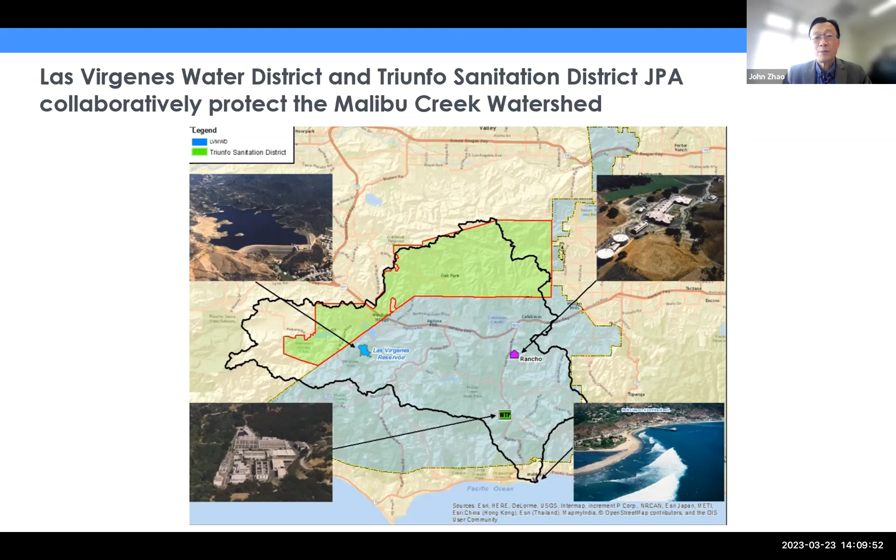And to the upper left, we have the Las Virgenes Reservoir, which has a capacity of 9,600 acre feet. And just a side note, because of the rain, we were able to accumulate 4 times as much water as a normal year due to the runoff from the surrounding hillsides. So that's just to show how much rain we had this year. Next slide, please.

So the drivers, why we want to build a pure water project. The driver to build a pure water project is regulatory. In 2017, we received an NPDES permit, which is based on the TMDL rule from US EPA, that mandates that in our discharge in the summertime, the nitrogen is 1 milligram per liter and the phosphorus is 0.1.

For those of you in the water industry, you know the MCL level for drinking water for nitrogen is 10. So we need to treat the water 10 times cleaner than the drinking water level before we discharge into Malibu Creek. In the wintertime, it's 4 milligrams per liter for nitrogen and 0.2 milligrams per liter for phosphorus. And the regulatory deadline is 2030.

And we're hoping to build our full-scale advanced water treatment plant based on the experience we get from the demonstration project. We're hoping to finish the full-scale project by 2028. Next slide, please.

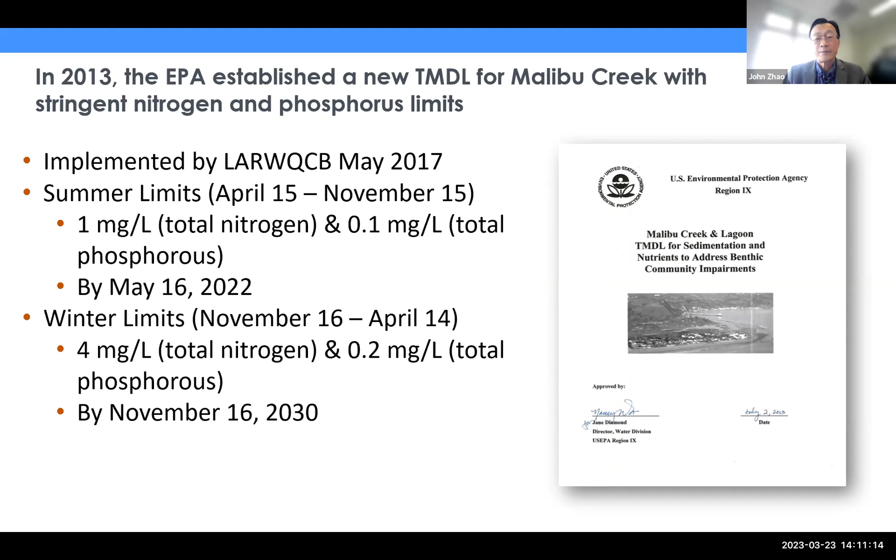So with a regulatory requirement like this, we embarked on a stakeholder process to figure out the best way to meet the regulatory compliance need. So we looked at seasonal storage. We said, well, in the wintertime, can we store the recycled water in a reservoir and then use it during the summertime? As you know, to build a reservoir in the Santa Monica Mountains is not an easy task, if not impossible. We also looked at, can we upgrade our water reclamation facility at Tapia to treat the water to that level before we discharge into Malibu Creek?

And the third option we looked at is, can we utilize potable reuse? We need to treat the water to 1 milligram per liter of nitrogen. Can we use potable reuse via reservoir water augmentation? Meaning, can we treat the water in the wintertime and put this exceptional quality water into our Las Virgenes reservoir and then use it during the summertime? And the stakeholders unanimously agreed that potable reuse via reservoir water augmentation is the project we should embark on. Next slide, please.

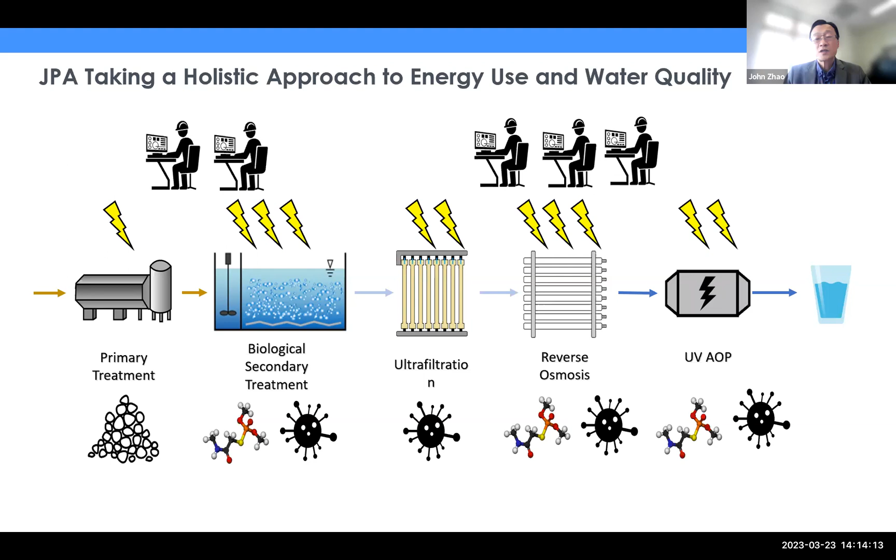And we want to see if we can utilize artificial intelligence and machine learning so that, in addition to the biological and the physical barrier, we can build, using AI and machine learning, a virtual barrier, meaning not only can we reduce energy use, we can safeguard water quality, and at the same time also discover issues ahead of time and make timely decisions while trying to prolong the life of equipment that we're relying on in order to deliver exceptional drinking water to our customers. Next slide, please.

So there's three goals we want to accomplish. The first is that we want the pure water demonstration project catered to our customers, so that people can understand the process, and people can be relatively assured, through visiting the demonstration project and receiving the education documents, that the water is safe. So we designed that, as you can see. Goal number one is for our customers.

There's an interactive process. Goal number two is training our operators. As I just said, we wanted to build and operate our AWTF by 2028. So we want to train our operators who can step into operating their facility, shorten the learning curve.

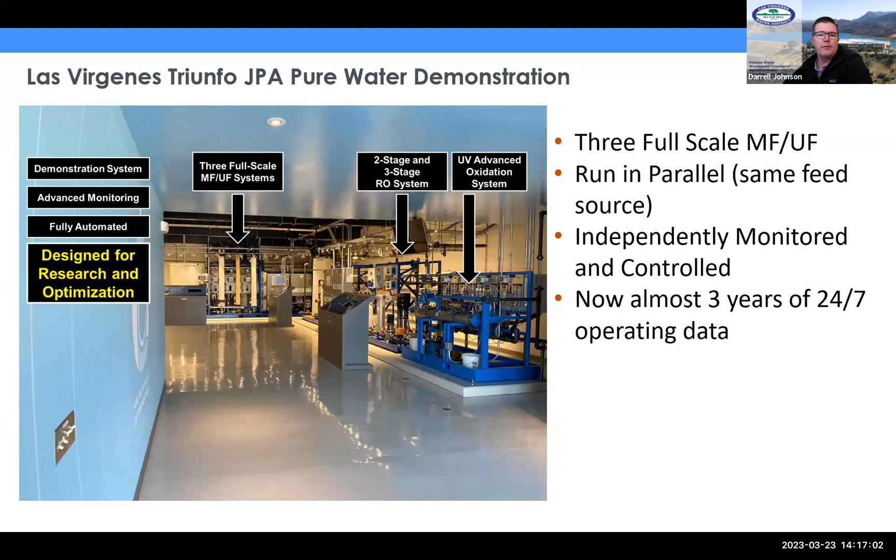We also have a lot of current AI work that's going on. Amos and Andy will both touch on this as we move forward, but our task one is model predictive control to reduce energy consumption. And then we have task two, the pathogen-based advanced water purification control. Both of these are Bureau grants with NWRI, and these are critical to our goals in meeting the direction that we want to go when we move into our full-scale facility.

So what we're going to do is start at Tapia, and because this is a little late in the day, everything got delayed by COVID, we've actually progressed quite a lot. But what I'm hoping you'll realize is that this seed funding from Metropolitan on this initial grant actually kickstarted a whole lot of really interesting research, which Andy is going to go into a bit more later. We're letting the snowball roll on to try and identify where and what is possible and what's worth it when trying to apply machine learning and artificial intelligence.

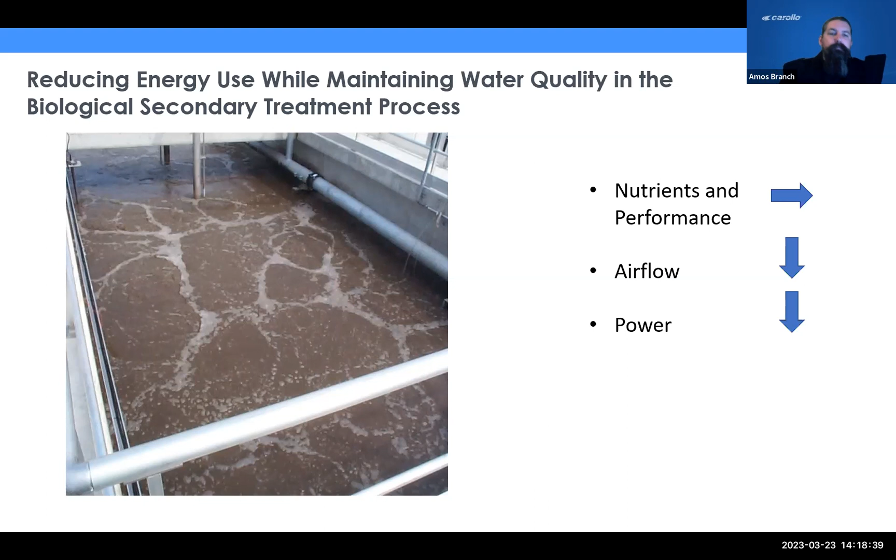So the primary goal when we looked at Tapia was to keep nutrient removal performance at the same excellent level that it was, but to try and drop airflow requirements and thereby reduce power consumption. Now, there's a lot of models and ways you can do this. There's people who've built up solids retention time control strategies based on activated sludge models, and they work quite well. But what we did was a little different.

We were partnered with Yokogawa Electric Corporation, who have used this data-driven model optimization control strategy previously on oil and gas type optimization issues at oil and gas plants. And this was sort of a first step: can we apply this to a water reclamation facility, and where does it get us?

So the initial 2 steps, the steps as part of this grant, were all offline. So Las Virgenes provided their operating data, all the historian tags. That went over to Japan. Yokogawa fit their model to it and started to run what-if scenarios of, well, this is how you're operating now. Could we potentially do any better if we change set points in a more timely manner?

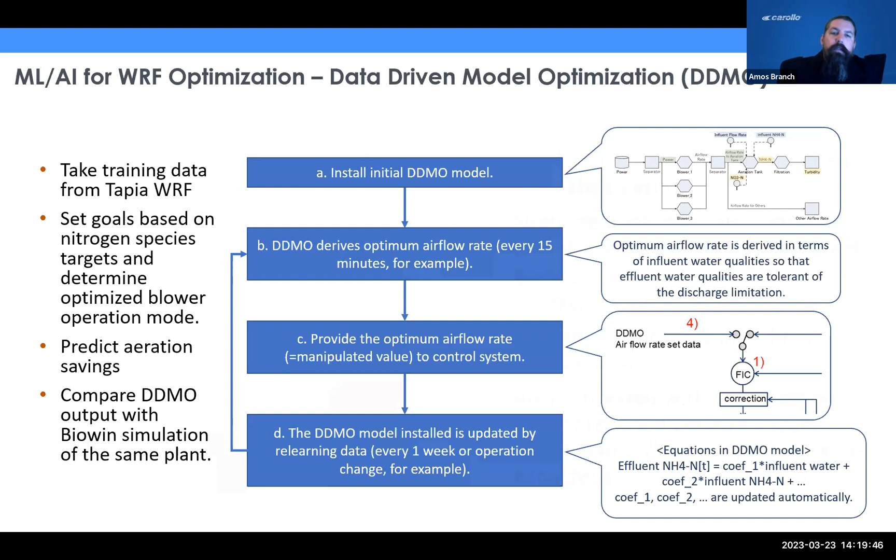So the initial results were quite good. We were able to predict the general trends in data, and we were able to indicate that if you made a few slight changes, there could be about 10% potential energy savings. This resulted in a marginal increase in effluent ammonia, but that marginal increase we're talking about is sort of from typically non-detect values to just being able to see it.

We also simulated an optimization with a goal of reduced ammonia, and we could do that if you wanted to push it down even lower to non-detect all the time. You could achieve that with only increasing energy consumption by 2.7%. So there are a lot of ways in which you could use this tool.

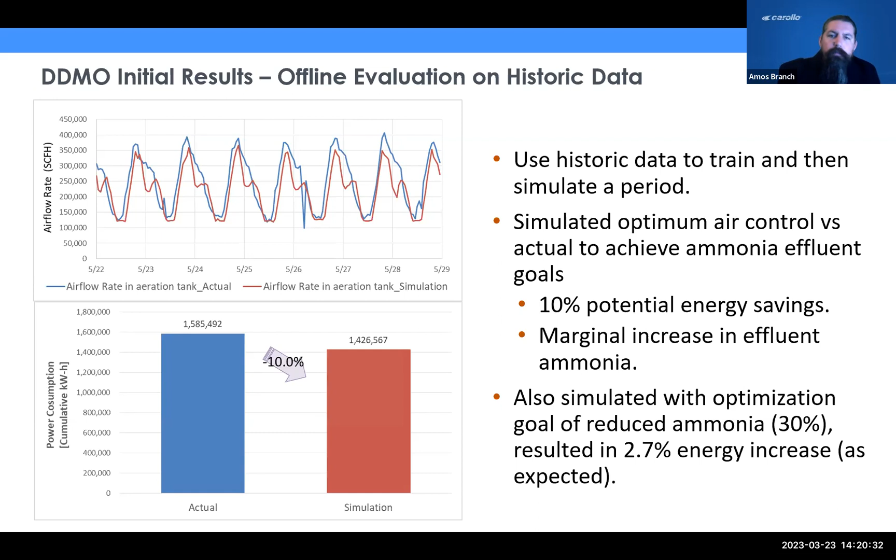Subsequent to that first step, and still as part of this Metropolitan supported grant, Las Virgenes actually upgraded the blowers, and we thought, oh, this might be game over. They've got these fancy new blowers in there now, this new hardware. Wonder if we can still bring anything. So we actually repeated this desktop application, and there was still potential for energy savings, still potential for around that 10%. And there was further monitoring installed during this second stage, which allows us to also demonstrate a potential for a slight reduction in total nitrogen as well, while still saving that 10% energy.

So we were pretty encouraged by these results, but the whole work package so far, I mean, it does use a machine learning approach. DDMO falls under that banner, but I wouldn't say it's automated, and I wouldn't say it's convenient. It takes a SCADA historian expert time to download all that data. It took our colleagues at Yokogawa time to fit their models, evaluate model accuracy. And what we really want is an actionable tool. So based on this work and using the results from this work, we're able to put forward a solid bit of evidence and actually progress this to the next stage.

And the next stage is get it done in real time, get it done automatically, and give the advice to your operators. So this is where Las Virgenes had already started working with IOsight, who are a data management company who have these really pretty dashboards. And we were able to pull in the tags from IOsight, get them shipped over to Yokogawa in Japan, and automate model predictive control based recommendations as to what should be happening should the operators wish to sort of optimize their control strategy.

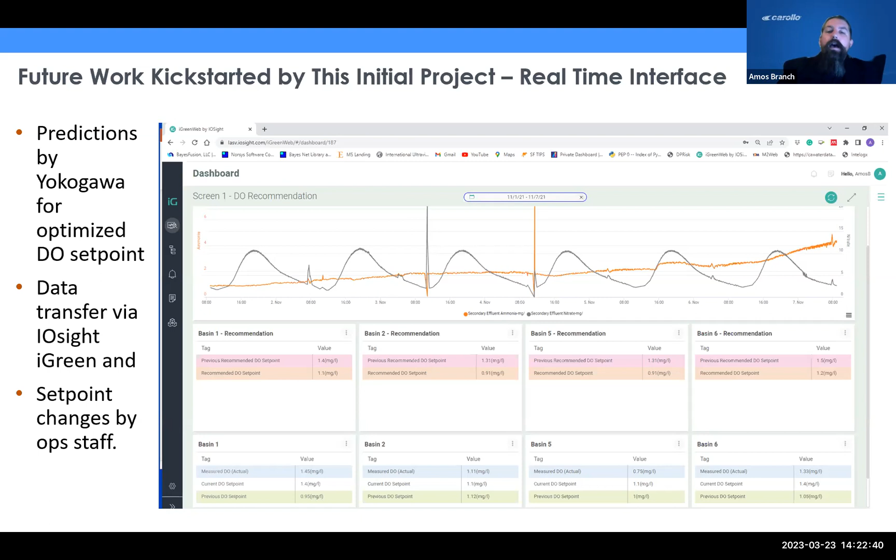And so the status quo is set the DO at something you know works and leave it there. What this allowed was recommendations for that DO set point based on influent flow, influent ammonia, and general plant loading throughout the day. And we were able to trial it in real time. So I'll just show you one of the other dashboards now in terms of monitoring the actual impact, monitoring the changes that were implemented to give evidence that the process was actually doing something.

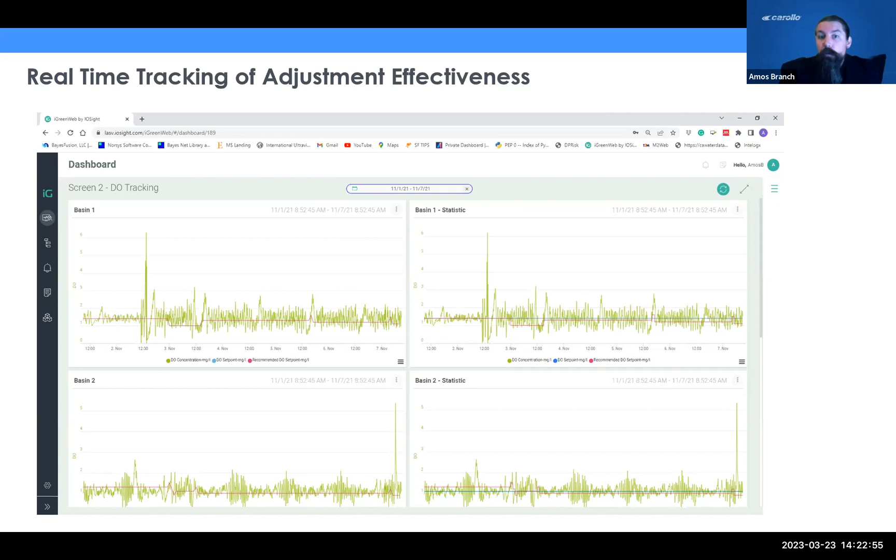And at the end of this, what we realized is that you could potentially shave, depending on what basis you looked at it, either kilowatt hours per pound of ammonia treated of around 25% just from making these simple changes. We only did that during 8 hours a day, or somewhere around 10% if we just looked at that base energy usage. So depending on how you wanted to look at it, there could be some quite useful savings there.

So moving downstream, the next thing is, let's have a look at the potential energy savings at an advanced water purification facility, and what could we potentially do with micro and ultrafiltration. So at the demonstration plant, we do have those 3 different independently monitored and operated microfiltration membranes. They're all operated on the same feed source to help guide decisions on procurement and membrane operation. Fairly typical operating set points. We're not trying to break the mold here. We're trying to develop design criteria.

But a unique opportunity, because this is generating data in quite a large proportion of the time. So almost 3 years of operational data now with 24/7 operation and an uptime of over 94% for all of those units.

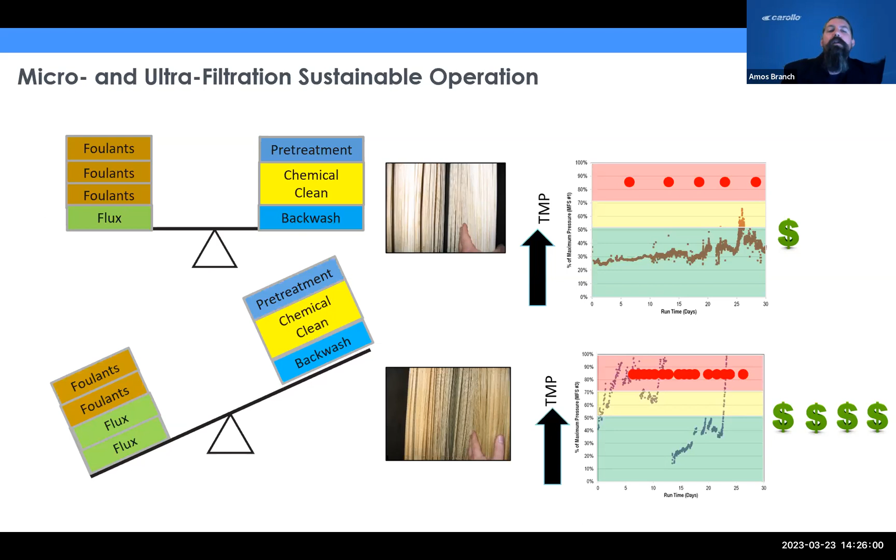So this was something supported by the metropolitan work, and it was, well, what would be useful with a membrane system? I know what would be useful. Can we predict the future behavior? Can we sort of, at a first step, look at where we're going to be down the track? Because what this allows us to do is actually judge whether we are in a sustainable zone or not, theoretically, based on past performance. And it also allows us to start optimizing things like chemical cleaning practices.

So I didn't make it easy for Yokogawa. At the end of November 2020, so this is with about 5 months of full scale operating data from the demo, I told them I'm going to operate like this for the remainder of December. You tell me what my transmembrane pressure is going to be. And what they told me was the black line, and what actually eventuated when I gave them the full set of results at the end of December was the blue dots.

So sure enough, it's a real plant. There's some variability, but what I think is really quite important to point out is that they really did do quite a good job of nailing that central tendency. So we started to get excited about our capability and capacity to start predicting the future, basically, and started to think about applications which we could use this.

Now, I have circled a couple of outliers. The first one's not our machine learning model's fault. That's my fault. I increased the flux. I didn't tell them. We expect that. And then the second one is actually us conducting a recovery clean. So that's a deep clean of these membrane systems. It had only happened 3 or 4 times before this. So the model hadn't really had a good chance to bite at a training set to encompass that event. But otherwise, this was quite promising.

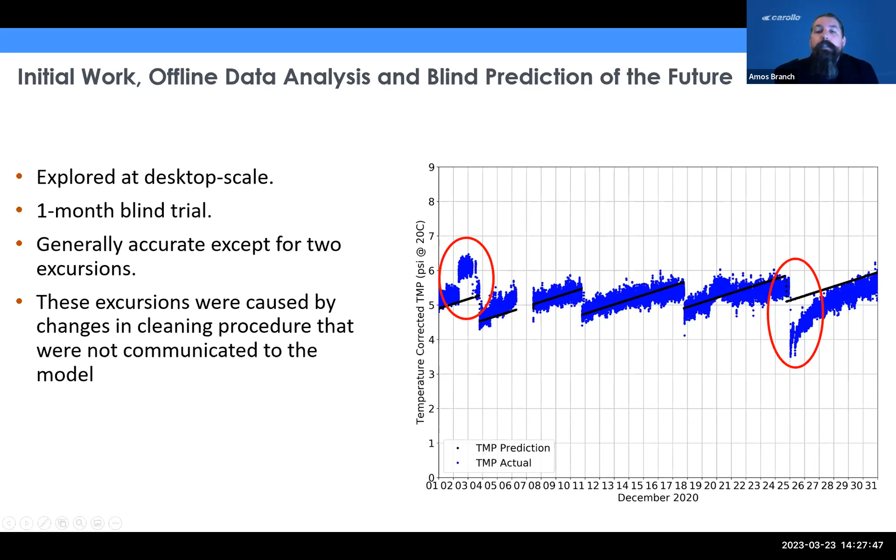So we moved on then, and Yokogawa sort of revised and improved that model. So they discriminated it into 2 different parts. And what I liked about this approach, it's moving towards explainable AI as opposed to black box AI, which is we're trying to target incremental things that we know are inputs and work with those, because that makes it a lot easier to understand what this AI model is doing and what it is doing its predictions based on.

So a couple of the things that were isolated were the fouling rate, so the change in permeability historically, and also the delta permeability that happens when you enact chemical clean. And so you take those 2 models based on past performance and then use them to predict the future. So we did a whole lot of training during the 2nd year of operations, moved around some fairly wacky operational parameters to try and expand the potential range of conditions under which this model could gain some training set and validation set information from.

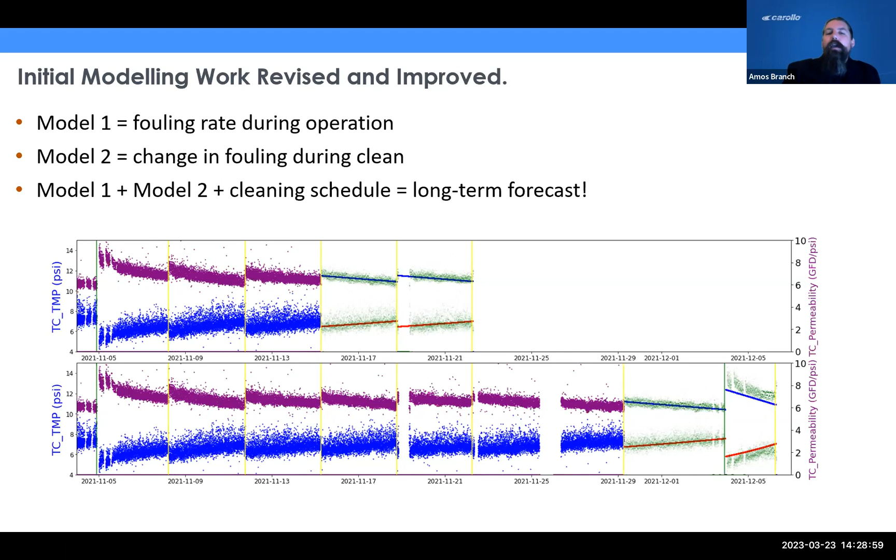Now, I do want to tell everyone, even though we had that pretty staggeringly good whole month worth of predictions, that the weatherman never seems to get in trouble for making bad forecasts. And we didn't want to judge this too hard either, but we did test it hard. And the reason we've got this in there is we do have the preconception that the further we try and predict into the future, the less accurate it's probably going to be. So we wanted to test this model and say, well, how inaccurate are we going to get?

So in terms of the sort of second set of data I'm going to show you, we said, well, Yokogawa, we've got 3 months left in the evaluation period where we can start playing with parameters. This is how we intend to operate. Tell us what's going to happen 3 months down the line at day one of our trial after you've had sort of this training set to work with. And then we started to investigate the accuracy of that.

So in week one, so from day 0, the red line is the predictions, the blue line is the actual data. A mean absolute percentage error of about 5% and a root mean squared error of about 0.3 GFD per PSI. Now, the particular membrane we're looking at typically operates around 6 to 7, so 0.3 seemed to be pretty good accuracy.

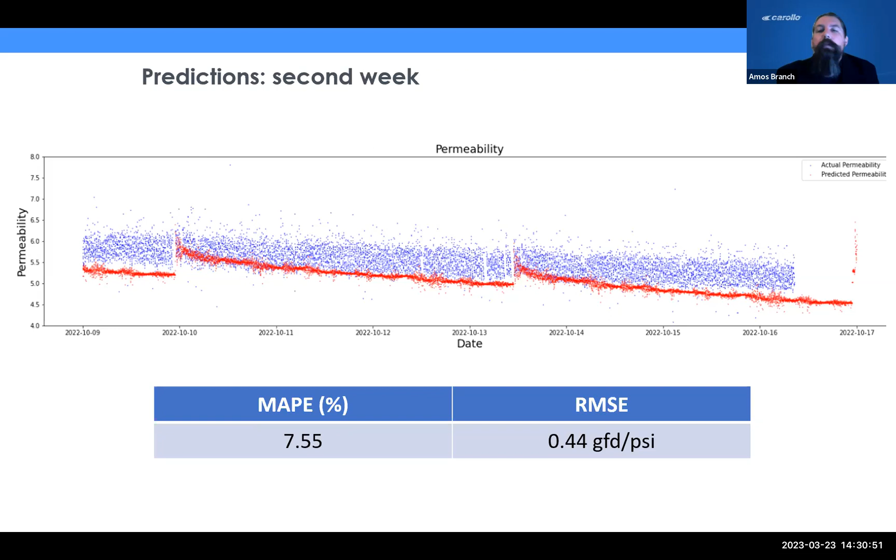Moving into week 2, so this prediction, pushing it further out, it's starting to drift down. It's starting to suggest performance should be lower than we're actually getting. But we're still within sort of 10% error or an absolute error of half a gallon per square foot per day per PSI. Moving into the 3rd week, sort of pushing that error out again to 10%, but still around half a gallon per square foot per PSI.

I do want to point out one thing though, that even though we are getting inaccurate, we do have a bias within the model, which is actually suggesting our future results are going to be worse than they actually are. And what that allows, and that was done by design, was to actually put a conservative estimate on where performance was going to be so as to not run into big problems and not be able to fix them.

What I should also point out is that unfortunately we made it difficult for our friends again, because they called us back up and said, look, there's something wrong with your cleaning. It's just not matching up. And we're pretty sure in our model. And sure enough, we checked with the site and they said, oh yeah, the hypo injection quill to the CIP tank broke last week. So we made it even harder for the model, but it was still able to sort of track within 10% accuracy.

So given we were becoming quite confident with this model, we started to think, well, what are the best ways in which we can use this? And if you think about an actual project, you've kind of designed the system, you've already installed the equipment for the most part by the time you would potentially be thinking about doing something like this.

So with all membrane systems, if you don't want them to foul, turn the flux down. But in reality, at a full-scale plant, you can't just say, I'm not going to treat as much water because I don't want my membranes to foul. It's not really a useful recommendation. However, what is useful is using the what-if capability of these models.

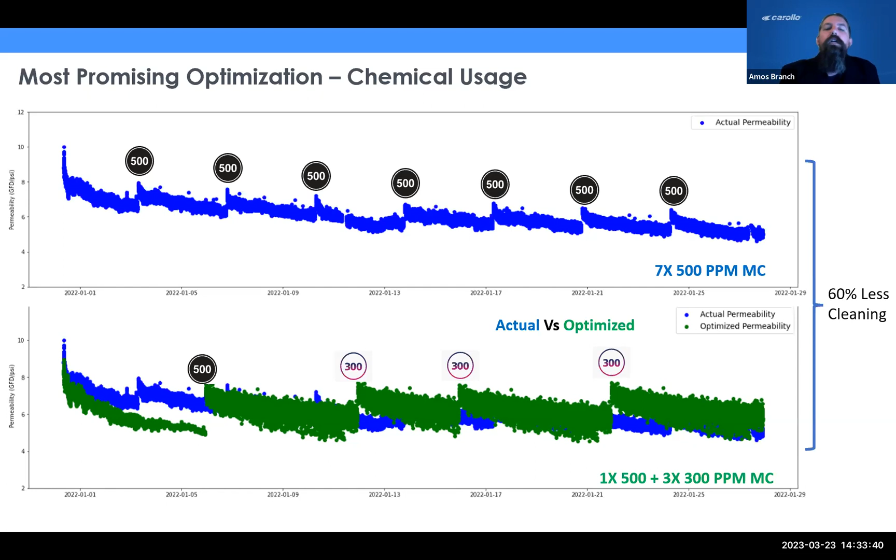So those are the sort of sets of results we've gotten through so far, none of which would have been possible without this initial seed funding. But where do we think we're headed? I mean, there's these big brands of intelligent water, and we're sort of on this semi-autonomous operation track. So what tools do we have with machine learning in the middle? What algorithms can we develop? And what actions are there to achieve our goals?

And that action to achieve goals, and then if you wanted to do fully autonomous operations, so bring on the Skynet, that could come back around and that could be part of the control system. At the moment, we're working on trying to provide better decision support for human operators. So this would be a segregated recommendations platform like we've already put together.

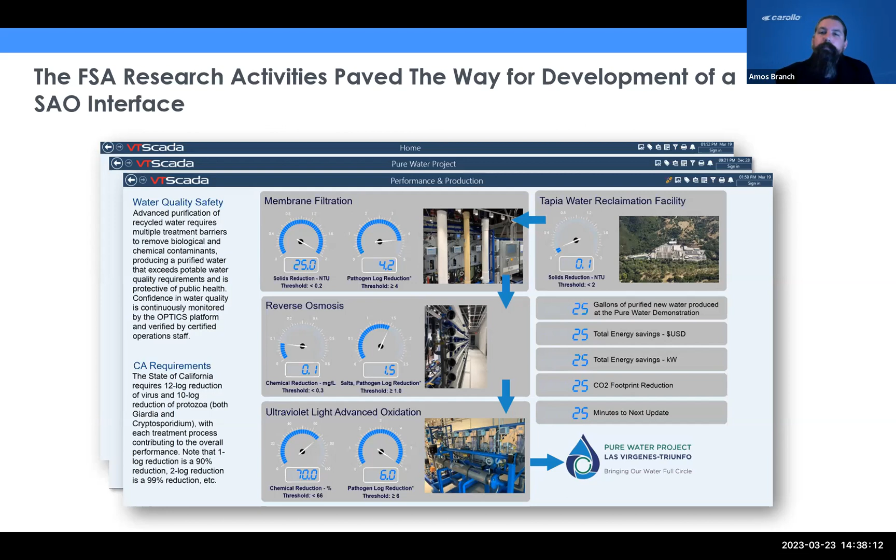So with that, I'd like to hand it over to Andy Salveson to talk about where we've been and other exciting things about where we're going. Thank you, Amos. Next slide, please.

So I was just going through my notes, and this all really started in earnest in 2018. So we're almost 5 years from an original concept. And in that original concept, which was some of this original funding, it was $75,000, I believe. And there was a lot of skepticism. I appreciate that. Skepticism always happens with stuff like this. And since that time, we've now developed more than $3 million of research funding into this topic.

And so it all starts with this original grant from Metropolitan, and I want to acknowledge it really starts with the support from the Las Virgenes Municipal Water District and their dedicated commitment to push ahead, because we didn't know where this was all going to go. But as you've heard from Amos, it's going in a real positive direction. You're seeing the early work looking at using machine learning to optimize biological wastewater treatment, which is all part of this potable water reuse cycle.

You're seeing, as I go left to right, evaluations and predicting ultrafiltration performance, flux and transmembrane pressure, and that is all about energy and then chemical use. And then the latest work now with the United States Bureau of Reclamation and the National Alliance for Water Innovation. These two projects are running in parallel. They're 3-year studies, and they're looking at the whole picture now. So what can we do more with the ultrafiltration? What can we do with reverse osmosis, which, as we all know, uses a huge amount of energy?

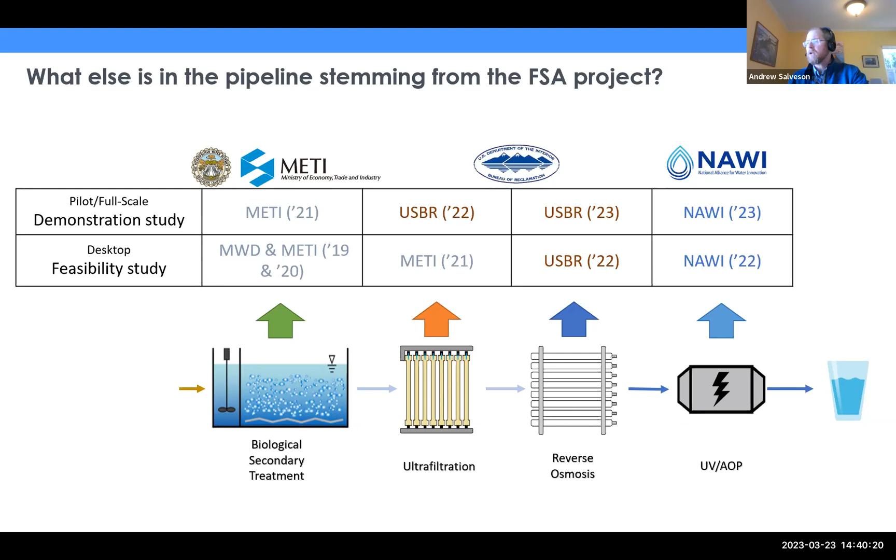And so if you go to the next slide, Amos, I want to highlight just a short little bit on both the USBR and NAWI projects. So this is just some early results from the NAWI work, where we're using a multivariate statistical process monitoring approach, MSPM. By the way, there's so many acronyms with machine learning, it can kind of set you back. But this concept here isn't just looking at one analyzer, it's looking at multiple analyzers that you may not have a significant confidence in, but combined, they can tell you that something's happening ahead of time.

So we're using this MSPM process to predict wastewater treatment plant effluent quality changes well ahead of what we would know if we just had one analyzer running. And so an example here is using different parameters related to membrane filtration, whether it's permeability or turbidity, and also wastewater treatment plant effluent quality like ammonia, to know that there's a problem before it happens. And then that allows us to take corrective action before poor water quality hits an advanced treatment process.

Next slide, please, Amos. Jumping over to the United States Bureau of Reclamation work. So that prior slide, I should say, that data was from the Las Virgenes Municipal Water District. This data here is from the United States Bureau of Reclamation project, looking at an extensive amount of microbiological and water quality data downstream of a membrane bioreactor, and using 6 data sets which have a relatively poor correlation, but when you put them together, they're able to confidently tell you if you're meeting a specific pathogen treatment credit.

So we have this term LRV, which is log removal value, and through analysis of these multiple data sets, we're able to have confidence: are we above or below a certain threshold? In this case, our threshold is 4 LRV. It could be anything, but if I go to the next slide, I'm just wrapping up and we can have any kind of questions and discussion.

So this research today stemming from this initial grant shows significant promise. There's more regulatory confidence that we can see. There's operational support. Data security is a big part of this, and we're demonstrating how to do that. Now, I take a moment and just reflect on that. It was a concern voiced by the Las Virgenes Municipal Water District. How do we maintain that data security?